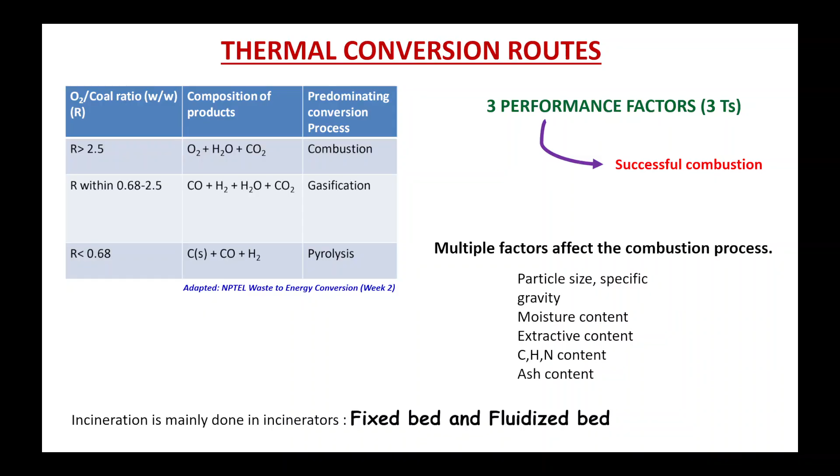So waste plus air, or oxygen, gives gases plus heat. These gases could be in the form of CO2, H2O, NOx, and SOx, different forms of sulfur oxides, which can be SO2 or SO3. Similarly for NO, it can also be NO2. Since different forms of oxides of sulfur and nitrogen can be generated through this combustion process, I have represented them as NOx and SOx. These are the gases that can be typically generated through the incineration process, and apart from that, you also will have ash content by burning the waste material.

One of the major advantages of using the incineration process is that you are able to reduce the waste material. So the waste material that is going to get deposited in the environment is going to be minimized. That is something like a perspective for a sustainable environment.

Time, temperature and turbulence. Yes, exactly. Temperature, time and turbulence, the three T's that determine how combustion will take place.

So how these properties affect combustion is something we need to understand. With the increase in temperature, it is obvious that more of the waste material will undergo combustion, leading to minimization of waste and more heat generated, which is useful for increasing energy production. So with increase in temperature, the combustion process will be more effective.

As temperature progresses, the waste material undergoes a sequence of reaction steps. Initially, when you heat the waste material, the moisture content present within it is removed. That is typically called the drying process.

After the drying process, once the temperature keeps increasing beyond 100 degrees Celsius, initially you will have free moisture, which is the moisture present over the surface of the material. Once that moisture gets removed, if you increase the temperature beyond that, the bound moisture, present inside, is removed.

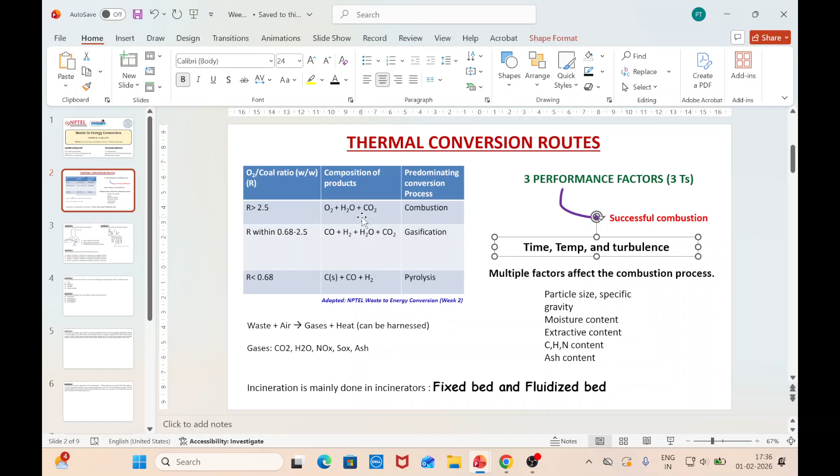So here you can clearly see in this table. Let me just zoom in.

So this is how, as you increase the temperature, the incineration process happens. The sequence of steps: drying, then removal of volatile species, then char formation, and then the gases get released. This is with respect to temperature.

Then with respect to time, what happens is, if you have a waste material, let's say a spherical waste material, as time progresses, the core of the waste material actually shrinks. This typically follows a shrinking core model.

I just want to know how many chemical engineers are there in the audience who have an idea what the shrinking core model is. Anyone who knows? Because this is something we read in chemical reaction engineering. Oh, I think I received a response. Anyone who exactly knows what shrinking core model is? Okay... someone is an electrical engineer.

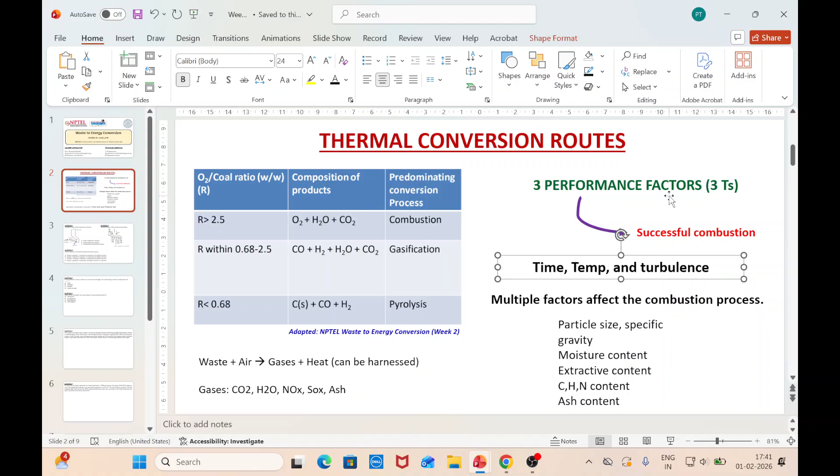There are also other multiple factors that affect the combustion process. From the material perspective, particle size, specific gravity, moisture, and CHN content are very important, as they will alter the heating values and the ash content. So this is about the combustion process.

One thing I'd like to mention here is the concept of excess air. When I say excess air, I mean how much more air is required apart from the stoichiometric quantity. That stoichiometric quantity needs to be present so that the materials can react with oxygen to form gases. How much more air is required than the stoichiometric quantity is what you call excess air. So excess air is the amount beyond the stoichiometric requirement. This is something you need to keep in mind as well.

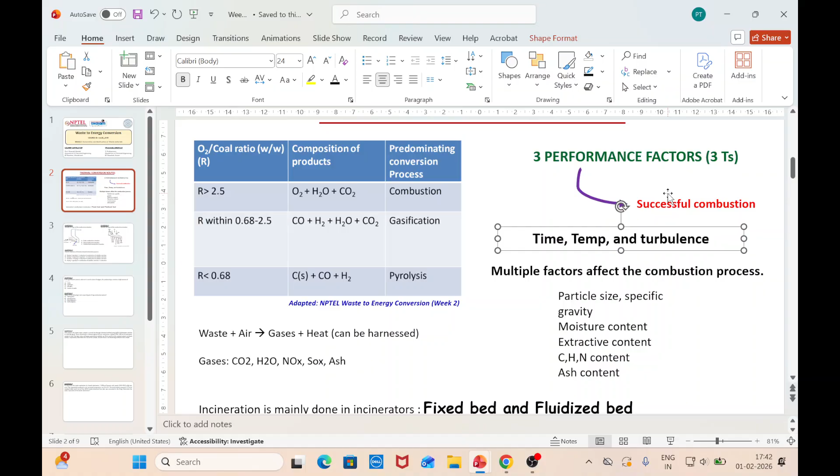Coming towards incinerators, this incineration process needs to be done in some sort of setup. For that we use two types of setups: fixed bed and fluidized bed. As the name suggests, you have one bed which is fixed, and another which is fluidized.

In case of fixed bed incinerators, the primary mode of heat transfer is through radiation.

The primary advantage of using a fluidized bed over a fixed bed is that in case of a fluidized bed, the waste particles will be in continuous motion, they will actually be fluidized. So the rate of heat and mass transfer in case of a fluidized bed will be much higher compared to that of a fixed bed.

In a fixed bed, what actually happens is the waste material is in the form of a bed, and then oxygen is supplied, the temperature is increased, and the combustion process takes place.

Whereas in case of a fluidized bed, you actually use a separate media, which is nothing but sand particles, along with your solid waste material. Both these particles are fluidized, they are in continuous motion, and for this you supply excess air from inside, so they are in continuous motion.

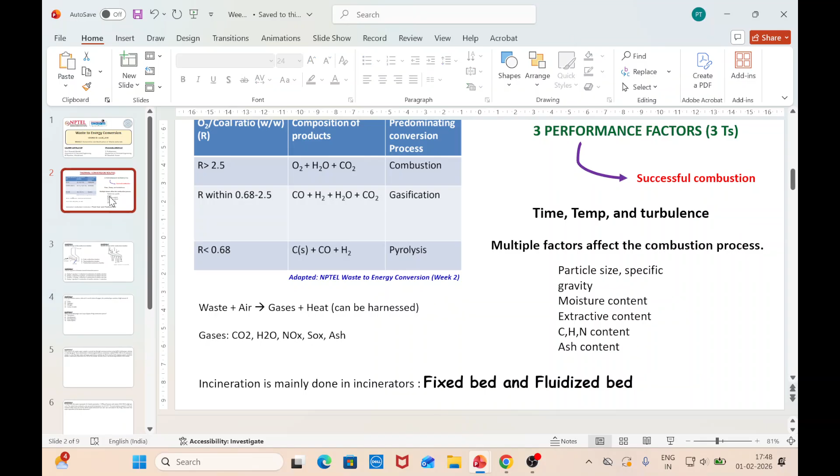I will not discuss those in detail, but we will discuss them in the form of questions. So, in case of fixed bed, you have underfeed stokers, and then you have grate firings. In grate firings, you have multiple different varieties: reciprocating, rocking, roller, and rotary kiln.

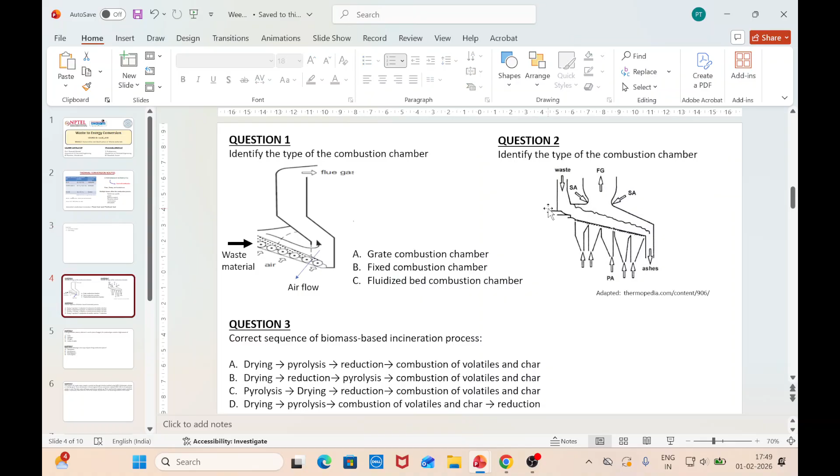So those we will discuss as we move forward. So let's start with our practice problem session.

Question 1: identify the type of combustion chamber that is used in the following diagram. Is the combustion chamber a grate combustion chamber, a fixed combustion chamber, or a fluidized bed combustion chamber? It should be a fixed bed combustion chamber.

Anyone? Based on the picture, what type of combustion chamber is it? Is it a fixed bed or a fluidized bed, or if it's a fixed bed, is it a grate firing combustion chamber? One person says it's fixed. Any others? So is it a fixed bed combustion chamber? What about others? I mean, that's just grate combustion. Okay, so two different answers. Anyone else?

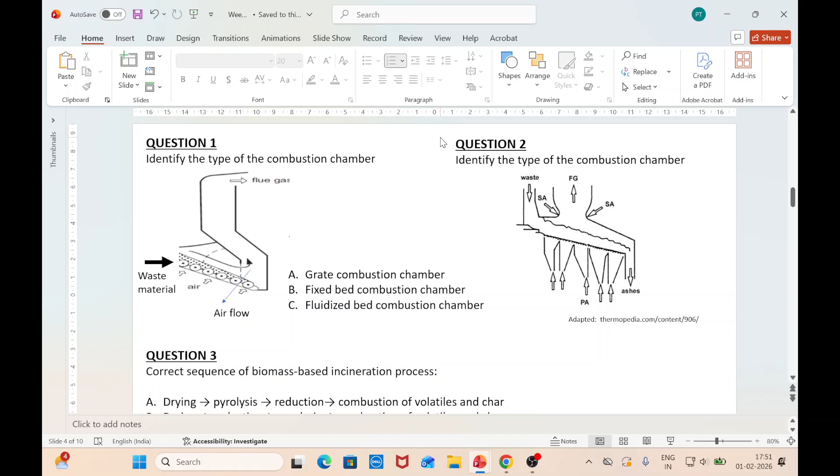I'll just show this. So two of them have told us, one said it is a grate combustion chamber, and another person told us that this is a fixed bed combustion chamber. So which one is right? Any third answers from anyone so we can confirm? Just think about this. Somebody says it's a parallel or co-current grate combustion chamber. Okay, so they say it's a grate combustion chamber.

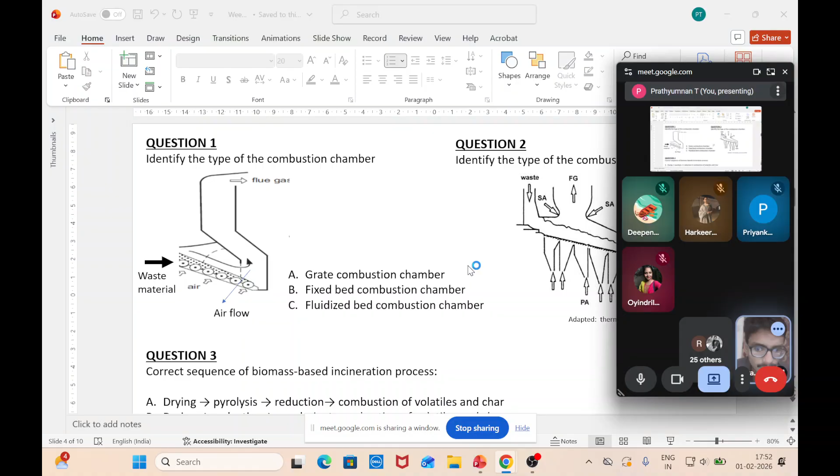Just a second, let me stop sharing the screen and share it back again. So this screen is visible, right? Completely, including question 2? Okay, fine, because I was having a doubt. With this, I think it will be easier for me.

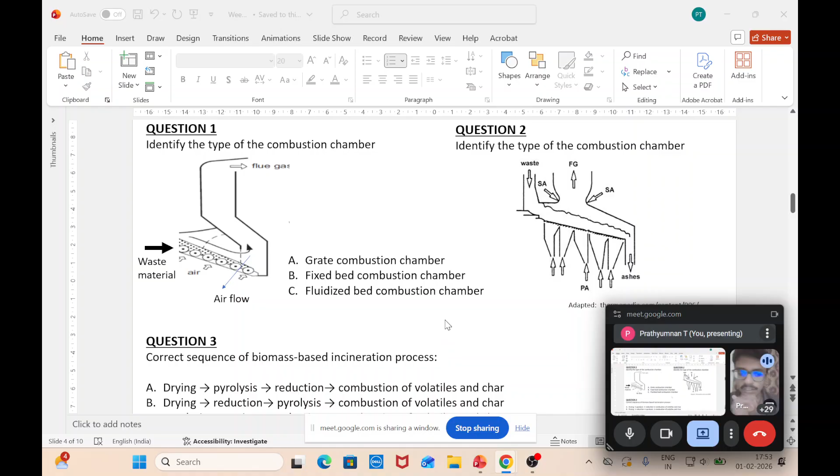Is it possible to reduce? Yes. Okay. So yeah, that's fine. So what will be the answer? Is it grate combustion chamber, or fixed bed, or fluidized bed?

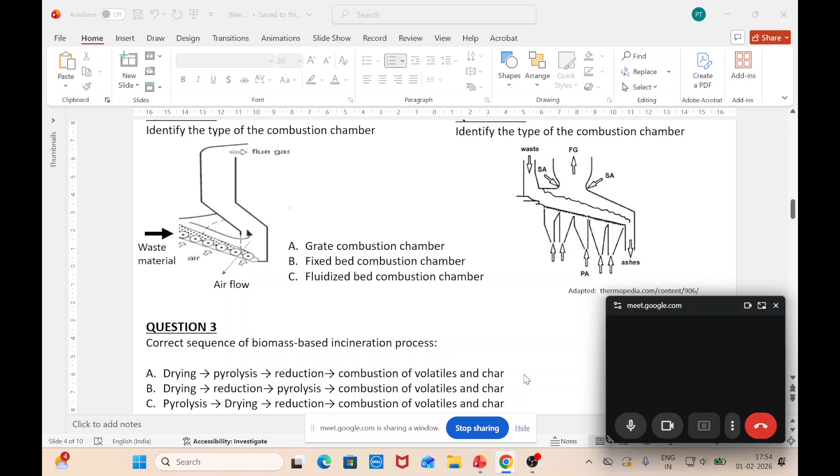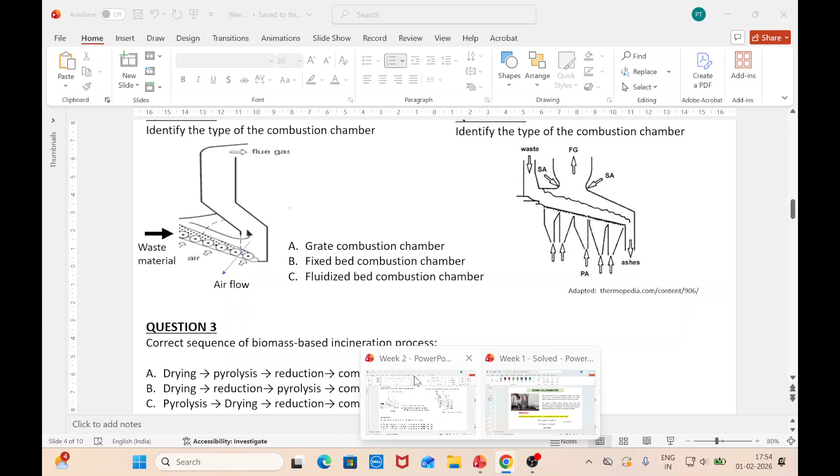Let me go back to that same view. Okay, we have someone saying grate combustion chamber. Okay, so this is correct. The answer is grate combustion chamber.

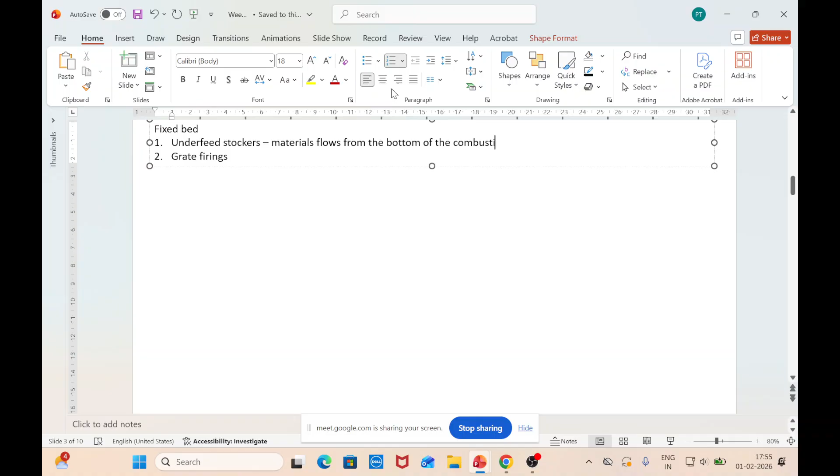Now let me explain, in case of the grate, what is actually a grate combustion chamber, or let's first explain underfeed stockers. This is very simple: the material flows from the bottom of the combustion chamber, or furnace. In case of grate firings, the main purpose of the grate is to hold the waste material inside the incinerator.

So that is the main purpose of grate firing. Why do we use grate firings? It is typically to make sure that the waste material is held inside the grate for a longer period of time, so that combustion is more effective. Since you use grate firings, an additional advantage is that the waste material as well as the air will be evenly distributed over the grate firings, which helps make the combustion process more homogeneous and effective.

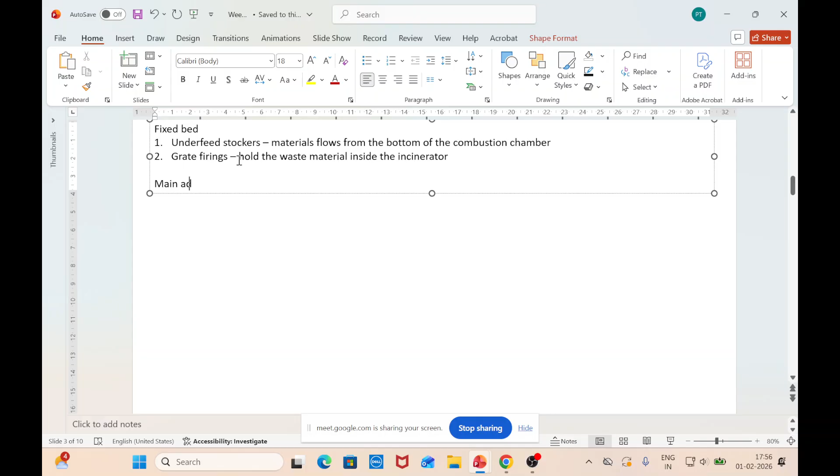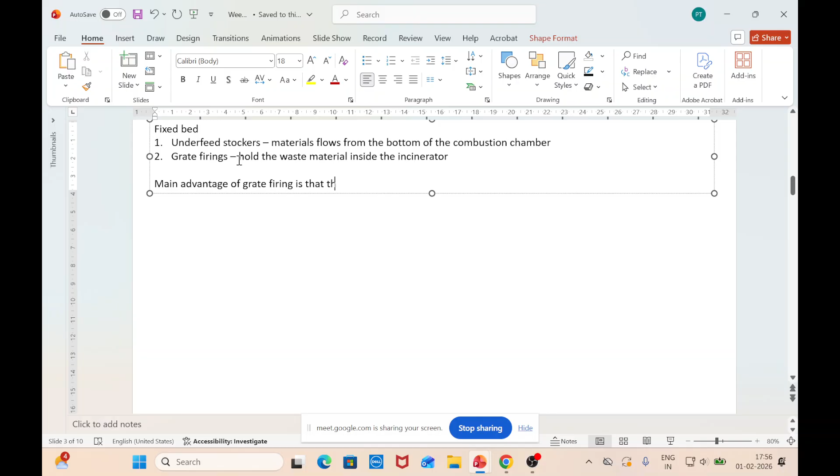So the main advantage of using grate firings is that the waste material and the air are evenly distributed over the grate, which makes combustion effective and homogeneous. There will not be any case of heterogeneity, like in one place there being more combustion while in another place less combustion occurs with more waste material remaining. That kind of heterogeneity within the system is avoided when using grate firing systems, and the combustion products are stable.

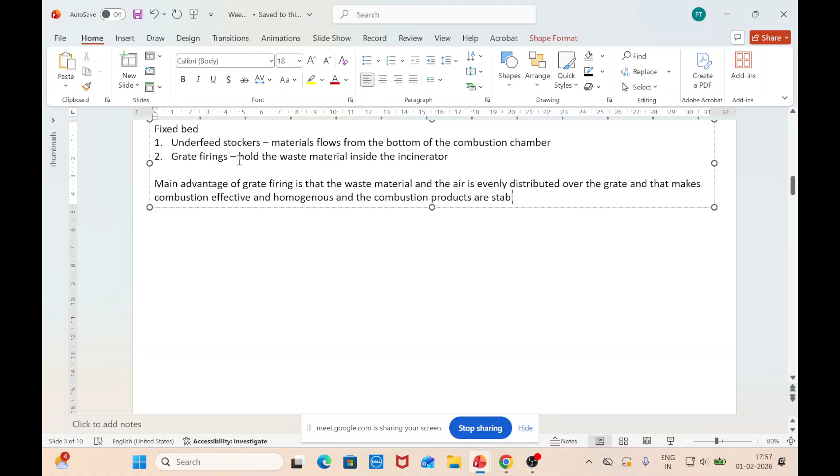So this is about grate firing. Based on this, the question was: now tell me, in the grate combustion chamber we have three different types. Let me push this ahead. One is reciprocating, another one is rocking grate, third one is roller grate, and fourth one is rotary kiln.

So among these four, which one corresponds to or matches the schematic given in question 1? Is it reciprocating grate, roller grate, rocking grate, or rotary kiln?

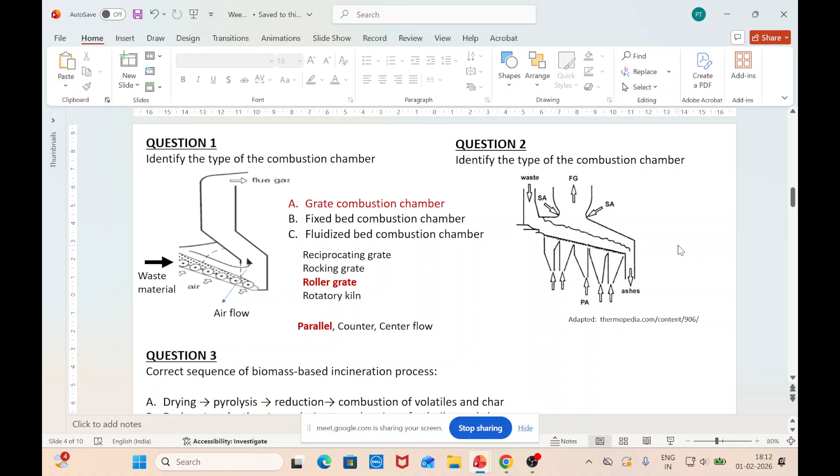Reciprocating. Great. Yes. So this is nothing but this is reciprocating grate combustion chamber.

But how did you differentiate between those? Why can it not be a rocking grate combustion chamber? Is there any specific identification element that you observed here that told you this is reciprocating and not rocking? Any arrangement will be different there.

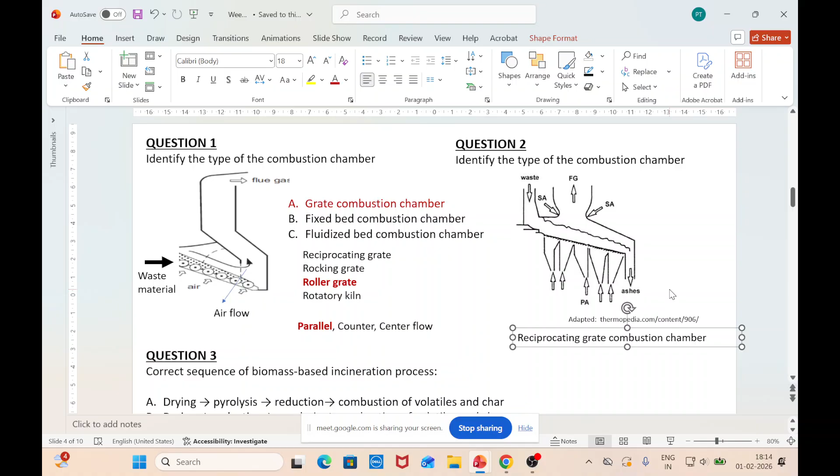Probably when I upload this presentation, I will have all three side by side and then I will justify what exactly the difference is that separates them in terms of their classification.

Moving to question 3, what is the correct sequence of the biomass based incineration process? We discussed this just now. Is it drying, pyrolysis, reduction, and combustion of volatiles and chars? What is the exact sequence of the incineration process?

Option A. So that's correct. It is drying, pyrolysis, reduction, and the combustion of volatiles and char.

Drying, as I said, when you keep increasing the temperature, at a particular temperature your free moisture will be removed. Beyond that, your bound moisture will be removed. Beyond which the pyrolysis process will take place, leading to the formation of char, and then combustion of volatiles and char also can take place. So this is A. I think this was quite straightforward.

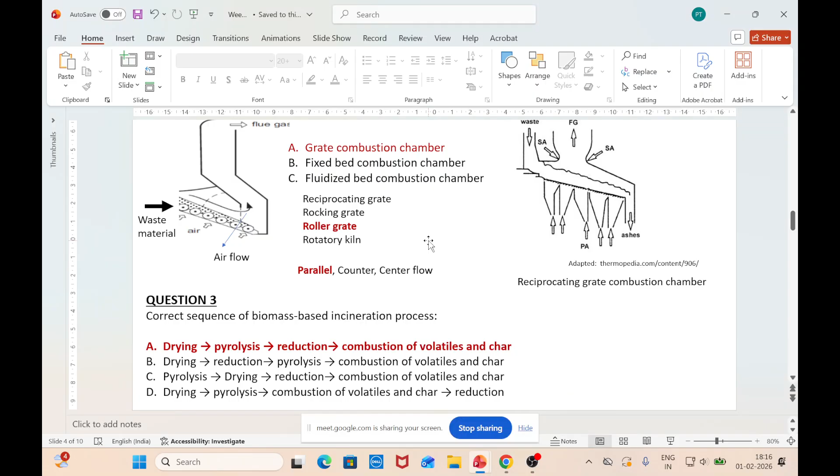Do we have any questions? Okay, everyone has responded with the correct answer. Let's move to the next question.

In the gasification process, if air is used in place of oxygen, the produced gas contains a high amount of what? So let's assume instead of using pure oxygen, I do not have availability of oxygen. So instead, I'm going to use air as a medium for my gasification process. Then the produced gas that I get at the end, or even in the incineration process, will have a higher amount of sulfur, hydrogen, nitrogen, or carbon dioxide.

Option C, nitrogen. Yes, air has a higher percentage of nitrogen. If you see any air charts, you will have 79 percentage nitrogen, and the rest goes to oxygen, typically 21 percentage oxygen.

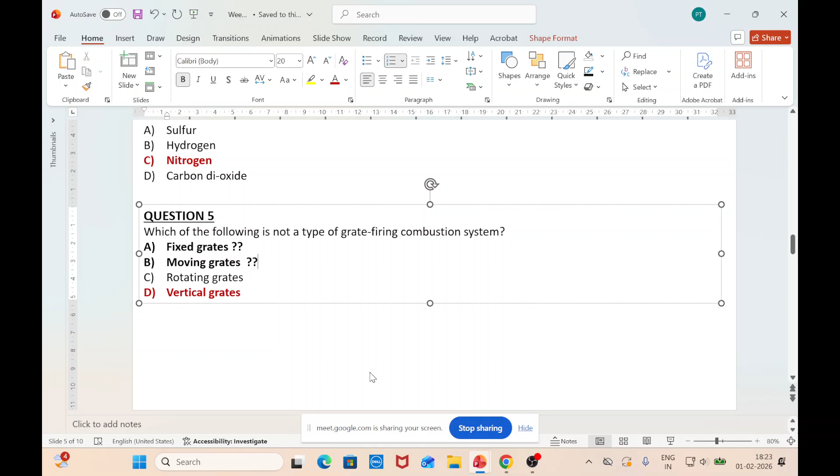But what about rocking grate? Someone has told it's a fixed grate, so try to identify this. Let's see, probably towards the end of the session. If you want, you can go through the video lectures as well to try to get an understanding on this. So before that, this is about the multi-choice question that we have.

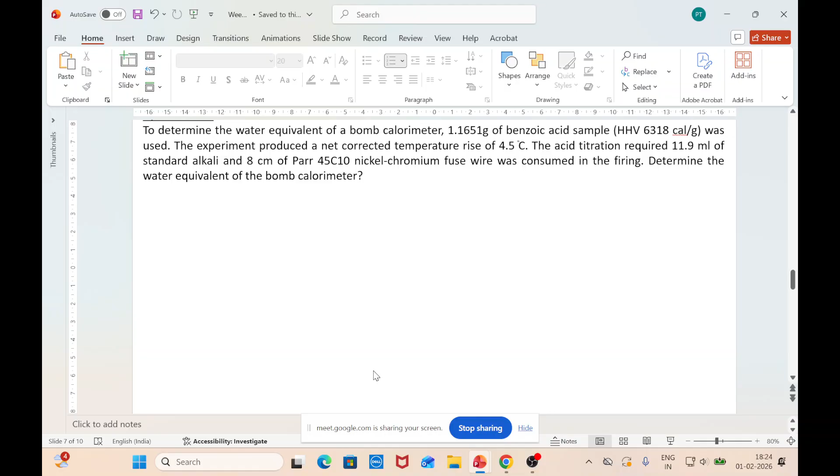Let's start solving problems related to this particular session. So this should be somehow question 6 - ordering has changed, so first let's go through question number 7 before going to question 6. So let me read out the question. Please solve this, it's something very similar to what we did in the last live interaction session.

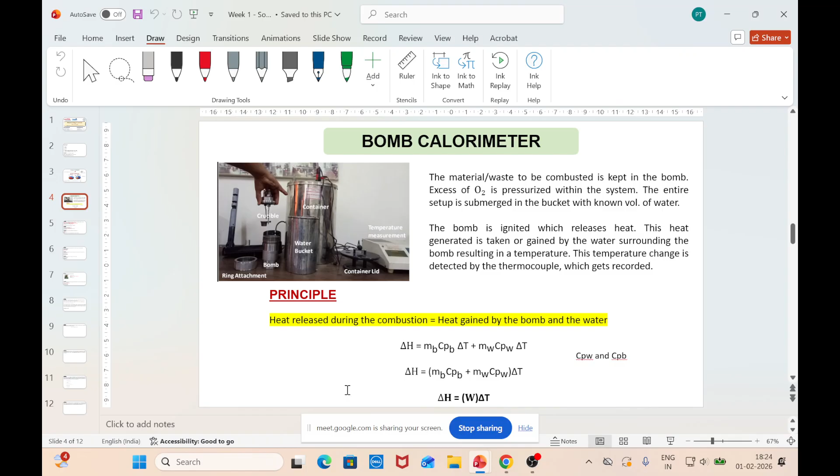This question - here I asked you to calculate the gross heating value Hg. Now here the question is to calculate the water equivalent of the bomb calorimeter, that is W. So try to solve this problem and let me know what you are getting as answer.

Here your HHV is given, and you have your acid titration quantity, 11.9 ml, amount of Parr 45C10 nickel chromium fuse wire is also given, the net rise in temperature is given, mass is also given - how much sample we are going to take under consideration.

I will, for your convenience, if you want. You can use this equation, but again you need to change the numbers, so please be careful.

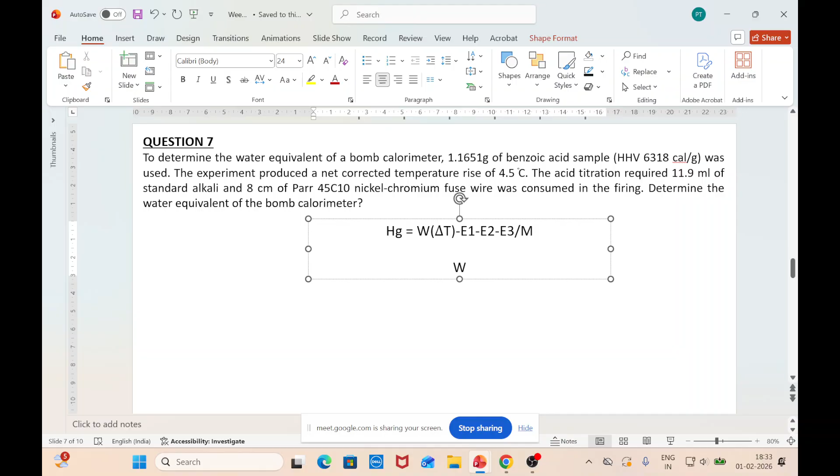Based on what I just said, we have to rephrase this equation. So water equivalent will be equal to m, that is the mass of the sample we are going to take under consideration - here it is going to be 1.1651 gram. H, that is nothing but your HHV value, plus E1 plus E2 plus E3 divided by delta T, that is nothing but 4.5 degrees Celsius. So water equivalent of the bomb calorimeter will be equal to mass, that is 1.1651 grams, times HHV, that is 6318,

plus E1 - what is the value of E1, E2 and E3? E1, E2 and E3 values.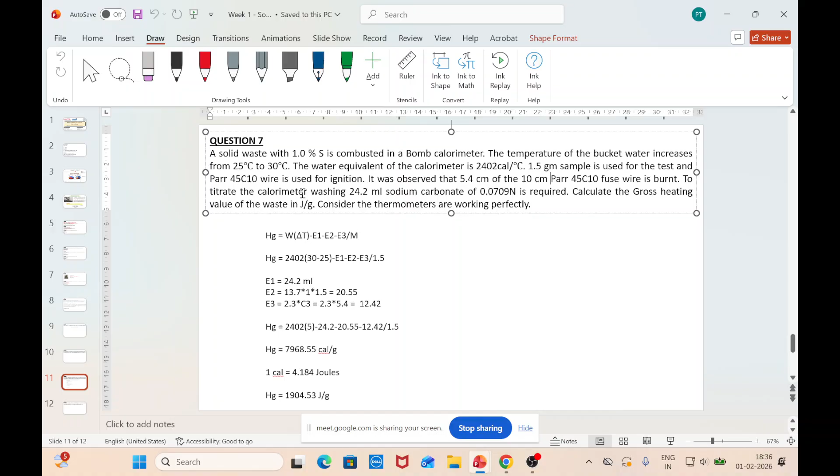So there is a mistake with respect to calculating the correction factor here also, right? Let me make this bigger. So what is the mistake here, and how are you saying this as 11.9? Is it 11.9 ml or does it have any other units? Or are we missing something from our side?

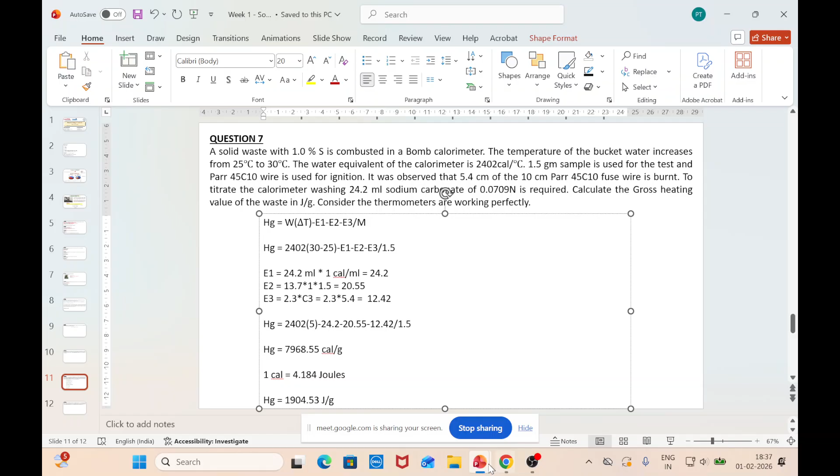Oh, there was some response. Okay, so you need to actually multiply this with 1. In case if you see the correction factors, this should be multiplied with 1 calorie per ml. So that actually makes up 24.2. Similarly, here also 11.9 ml times 1 calorie per ml, so that totally makes it as 11.9 plus E2, as someone said E2 value is 0.

Why? E3 is fine, 2.3 times the length of the Parr 45C10 nickel chromium fuse wire that is used, that is going to be 8. But why is E2 0?

This divided by delta T, that is 4.5. So there is nothing much. Why is E2 0? Or I will put the plus sign here. So as someone said, E2 is 0. Why is it 0?

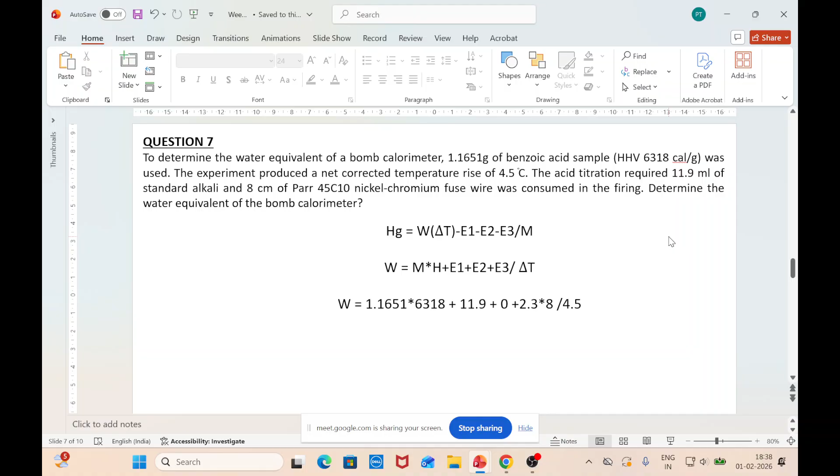Percentage of sulfur in the system is 0. In the question, the sample that we are going to take is a benzoic acid sample, which is not actually going to have any sulfur content present in them. So the E2 correction factor is for the percentage of sulfur present within the material. So here since sulfur is not present, it is going to be 0.

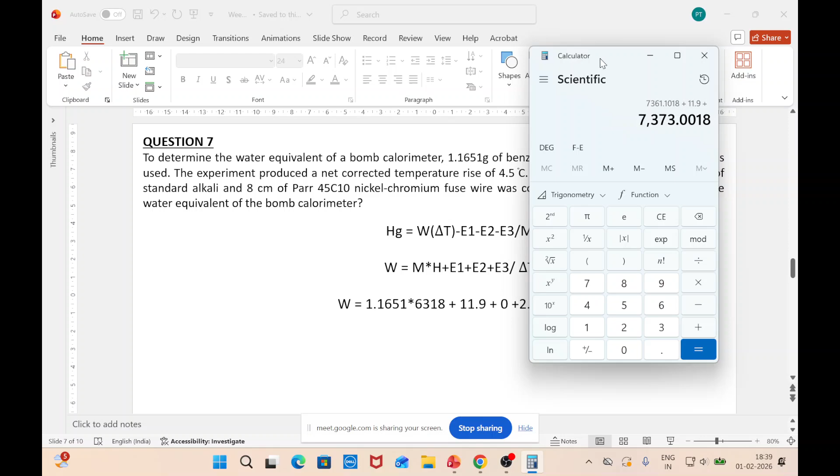So if you calculate this, then let me use a calculator. It is 1.1651 times 6318, plus 11.9 plus 2.3 times 8 is 18.4, which gives 7391.4018, divided by 4.5.

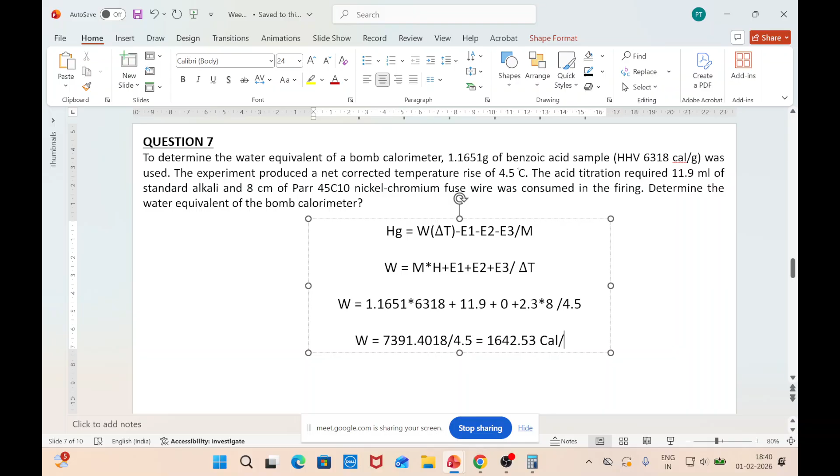1642.53, and the units are calorie per Celsius. Better to keep calorie per Celsius. So I hope the two answers that I received had similar values, so there is no doubt with respect to the calculation. Calorie per Celsius, so that's fine. Just a second, okay.

So is there anything that you were not able to understand? This correction factor values typically depends - in case specifically for the value of E3, if the wire that you are going to use is going to be some other material, then the correction factors that you are supposed to use for calculating will be different. So please be careful when you go for calculating the value of E3.

Anything that you are still not able to get in the question? I think we have solved two problems that are similar. Just the parameters that you are supposed to evaluate will be different. Again, variation in the questions can be introduced.

I can give all the parameters and ask you to identify the mass of the sample that was used, or probably give all the values and ask you to find the correction factors, let's say E3, and then ask how much amount of nickel or wire was consumed or left out. Again, it's just playing with the equation, the mathematics part of it. But I hope there is nothing related to the logic. However, in case if you have doubts, you're welcome to let me know.

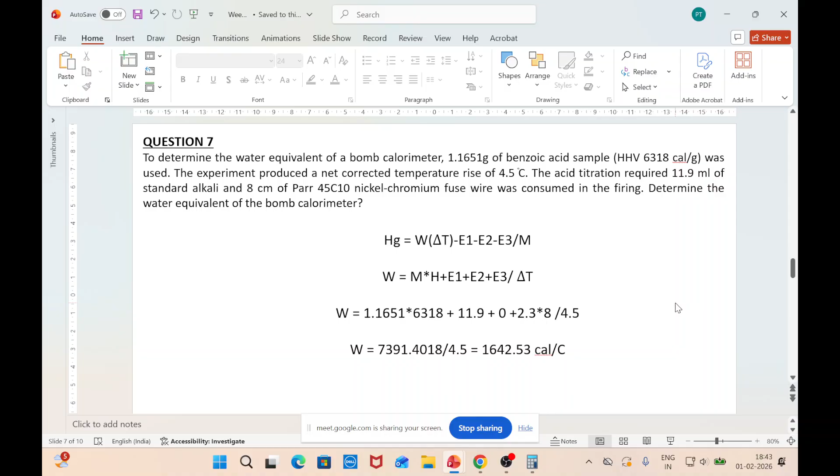First of all, last class we also discussed, many of you were able to say the full form of BOD, COD and TOC. But what does COD exactly represent? What does COD typically represent?

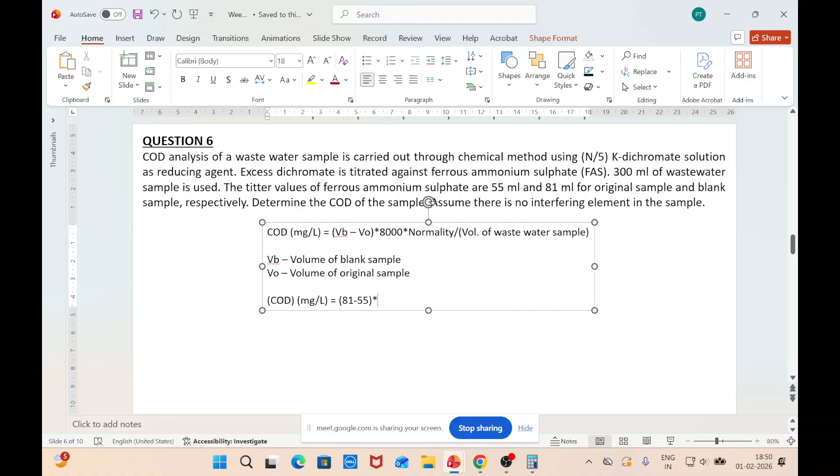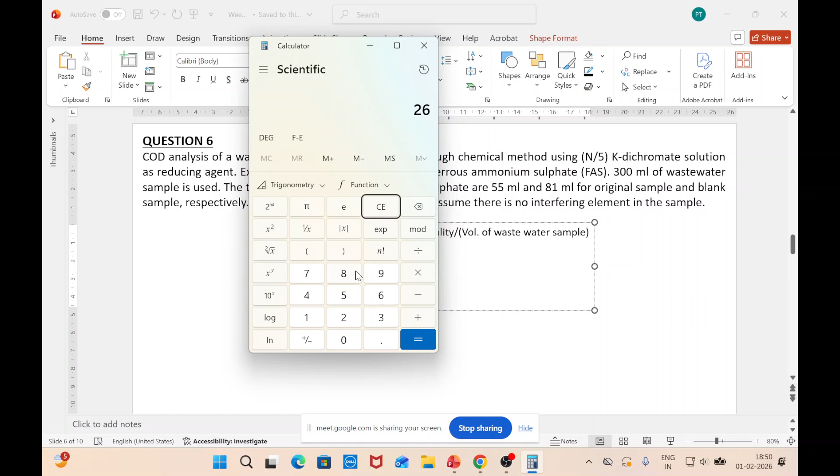81 minus 55 times normality, 0.2 by 5.2, times 8000, divided by 300. Is that correct? So that is 81 minus 55 is 26, times 0.2 by 5.2, times 8000, divided by 300.

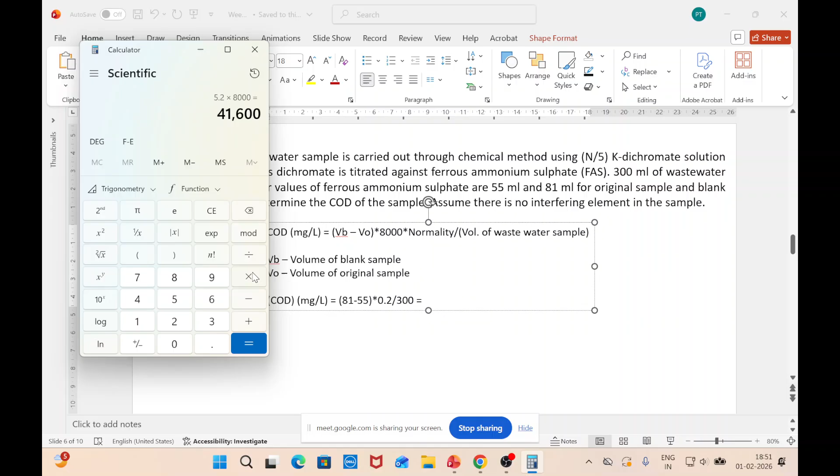That gives 138.67 milligram per liter. Now let's express the same COD in terms of ppm. This is in milligram per liter, but I want the unit conversion to ppm, because 138.67 milligrams in 1 liter is very small. Usually smaller quantities we represent in ppm, or if even smaller, we use units like ppb, parts per billion.

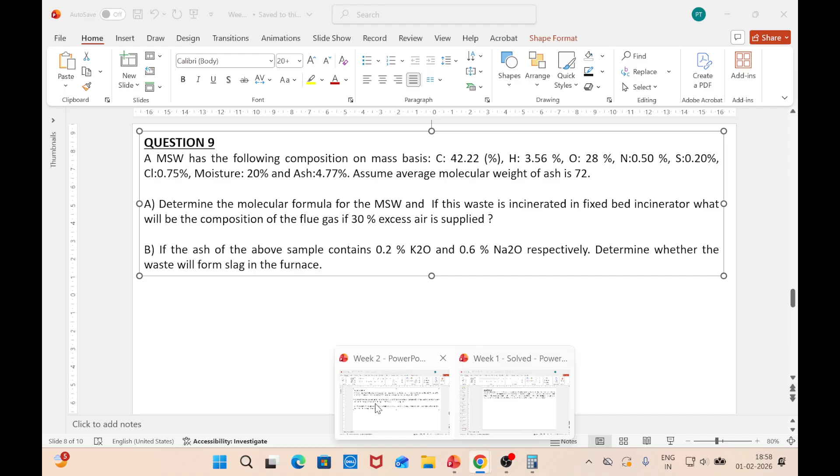Thank you for your response, Lakshmi ma'am. So yeah, what about this question?

Meanwhile, you solve this problem. Last week I asked this particular question. If you see in the upload, I have left this question blank. I wanted all of you to try out this particular question. Did anyone come up with an answer for question number 8 of week 1?

It's a very simple question, not a very tough one. In case if anyone had tried it out, let me know. Meanwhile, please see through this question. Let me know what approach you are going to use for question number 9, because as I said, it's a very big question. If you tell me the approach, we can start solving simultaneously.

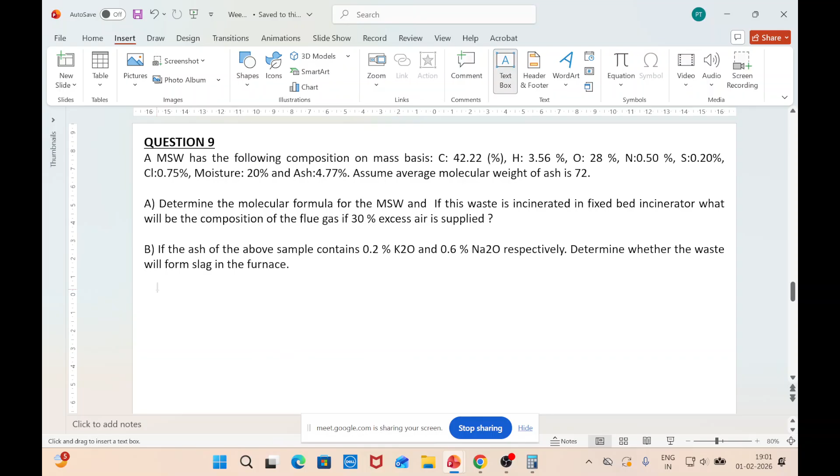So the very first step is, since this composition is given on mass basis, you have to take a basis. We assume our basis as 100 grams. Again, it totally depends on you, you can have the basis as even 1 gram. For simplicity in calculation, I am going to use it as 100. Using the basis, mass basis is your choice, you can use 1, 20, 100, 1000.

Oh, I think Sai Karthik, you copied and pasted, so it's not clear. Anyway, that's fine. I hope you have followed the same procedure, but in case if you have anything different, let me know.

So, based on this, by considering basis as 100, your carbon percentage is going to be 42.22 grams. Hydrogen is going to be 3.56 grams. Oxygen is going to be 28 grams. Nitrogen is going to be 0.5 grams. Sulfur is going to be 0.2 grams. Chlorine is going to be 0.75 grams. And moisture is going to be 20. Moisture is nothing but H2O. And your ash is going to be 4.77 grams.

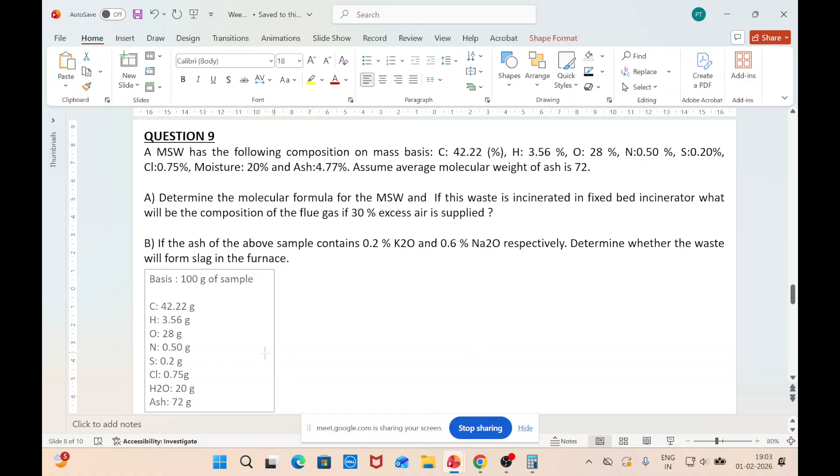Now, with respect to this, we are supposed to calculate the moles. Once we get to know the moles, we are supposed to calculate the molecular formula using mole fractions. So let's see.

For moles, we have to divide each element's given weight by their molecular weight. So carbon is 42.22 by 12, hydrogen is 3.56 by 1, oxygen is 28 by 16, nitrogen is 0.5 by 14, sulfur is 0.2 by 32, chlorine is 0.75 by 35.5, H2O is 20 by 18, and ash, sorry, ash should be 4.77 here, and it will be 4.77 by 72. So now with respect to this, we are supposed to calculate the number of moles.

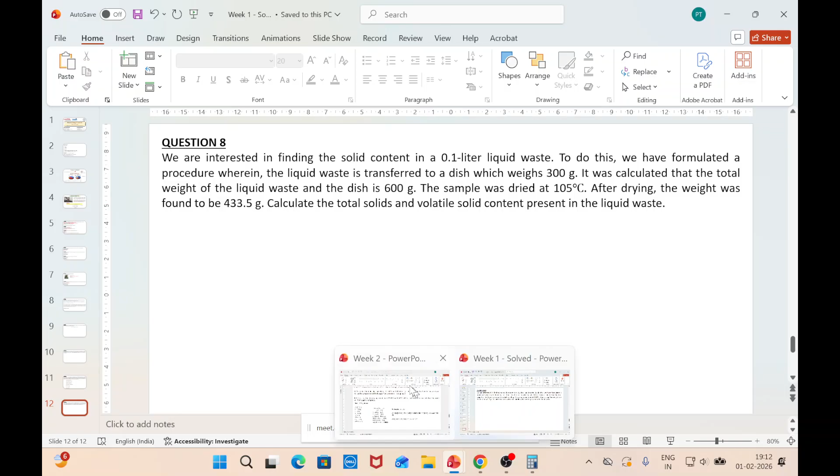I want the answer for question number 8 as well. If you have done it, please let me know, or if you did not have time last week, kindly do this question this week, because for the first 3 to 4 weeks we will discuss thermal conversion routes, after which we may not have time to revisit these concepts. So please solve this, and if you have any doubts, let me know the answer in the next class. Along with that, solve part A, the composition of the flue gas.

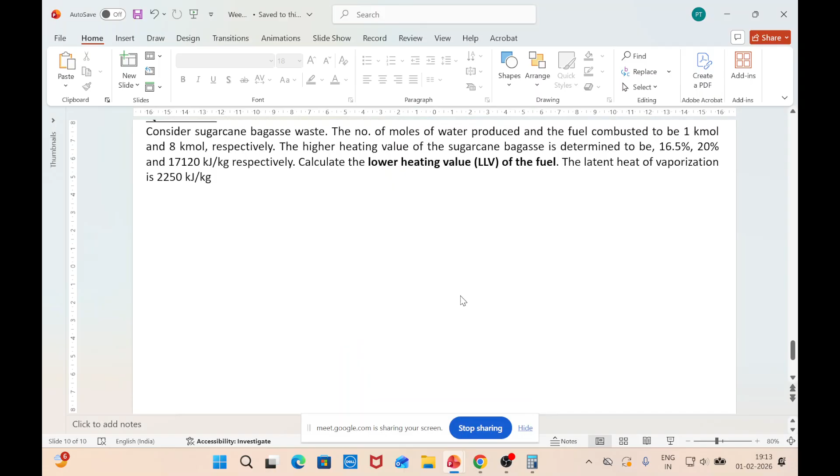Someone has just posted this. Let's see in the next class what the composition will be. I will not be posting the answer for this question, so please solve it, and we will take it up from here in the next live interaction session. So other than this, we have two more questions that we will take up in the next session. Till the time we are dealing with thermal conversion routes, we can always go back and forth. The problem arises once we close thermal conversion routes and move towards other waste to energy conversion paths.